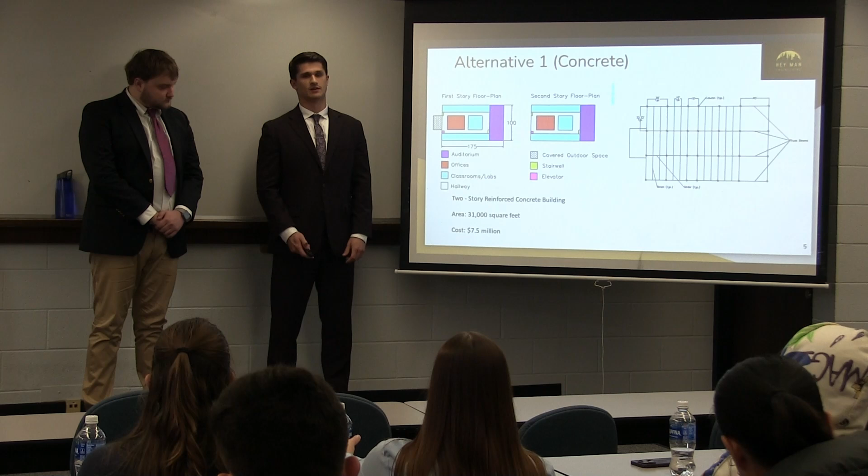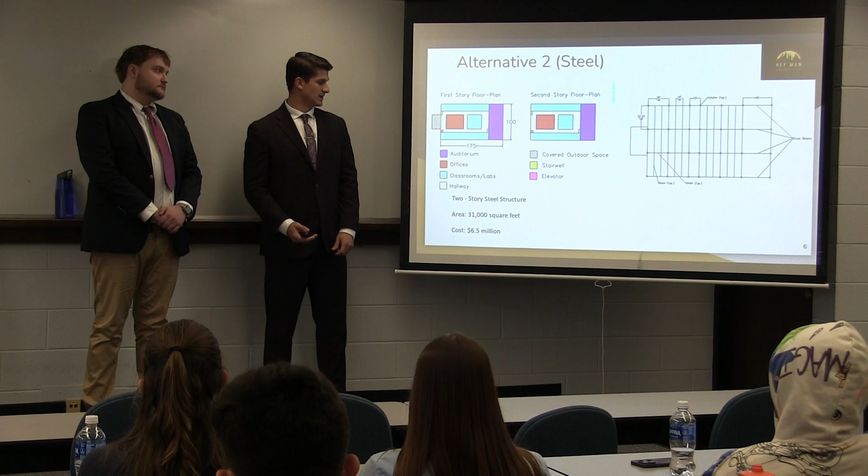Alternative 2 is the exact same as alternative 1, the main difference being it's a structural steel building instead of reinforced concrete. That said, the cost is around $6.5 million, also estimated using RS Means.

Alternative 3 is a little different than the first 2 in that the layout varies. It's a little bigger, roughly 32,000 square feet, and a 2-story steel structure. The courtyard in the center will act as the covered outdoor space, and the auditorium is a little smaller here, around 3,600 square feet as opposed to 4,000. Again, it will be a double height auditorium.

The layout is a little more complex than the first 2 alternatives, just something I want to note. Lastly, the cost was determined to be $6.8 million for this alternative.

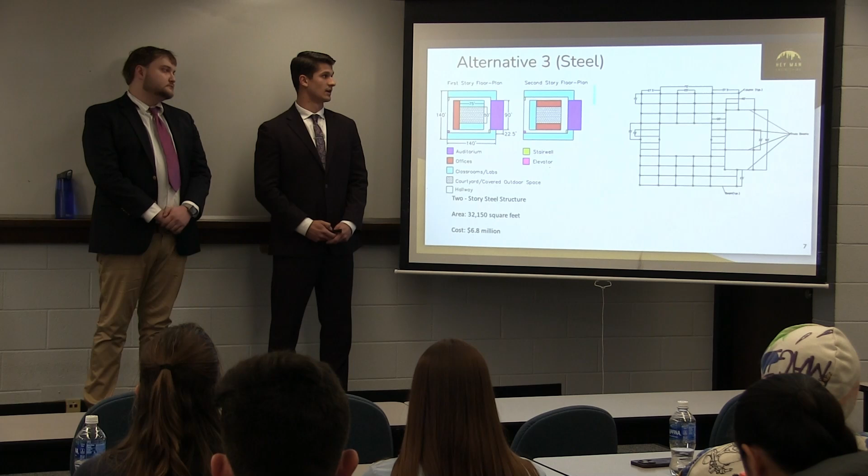This evaluation rubric pits the alternatives against each other, so it's not necessarily about market cost. If the alternatives are significantly higher than market cost, that's not the point; rather, if alternative 1 has a higher construction cost than alternative 2, then alternative 2 receives a higher score in that category.

The reasons for this include: it was the least expensive alternative compared to alternative 3 and alternative 1. It was also more feasible and less complex than alternative 3 due to the layout and design, and the space efficiency was also better utilized than alternative 3. Now I'm passing it off to Jack.

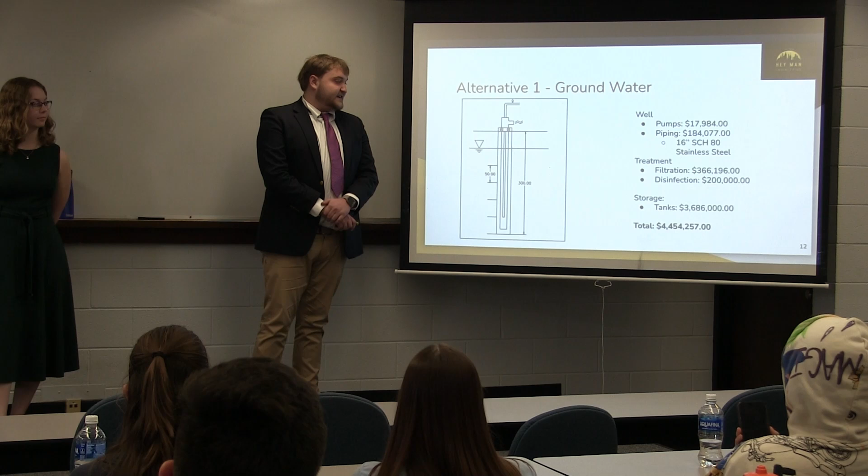As you can see, there will be a water pump on site, reaching about 300 feet in depth below the surface. The water level is about 50 feet below the surface. Calculated with 2 pumps on site, with the materials needed for the piping, the treatment systems for filtration and disinfection, and the storage tanks, this comes to a total of about $4.5 million for the first alternative.

Second, we have surface water, taken from Heaton Lake nearby, about 6,000 feet away, for which I'll need to construct a pipe. Here we have the different sieves that will filter out any large hazards, and a pump that will transport the water through. Calculating each of the costs, it brings us to a $5.5 million cost.

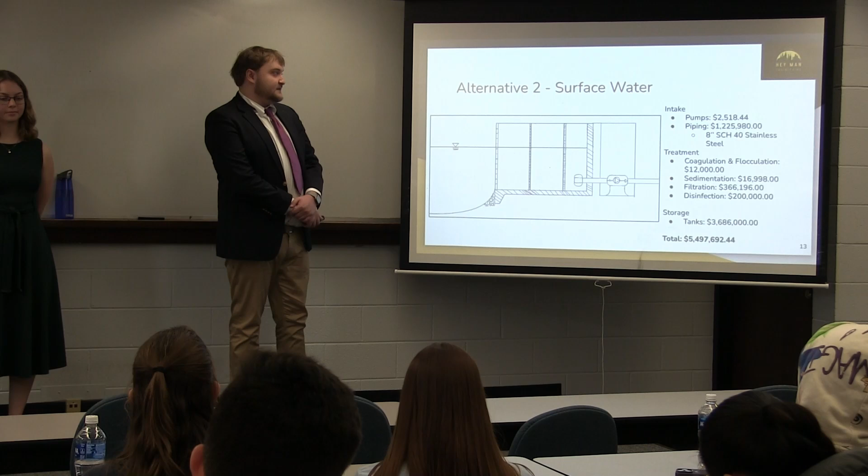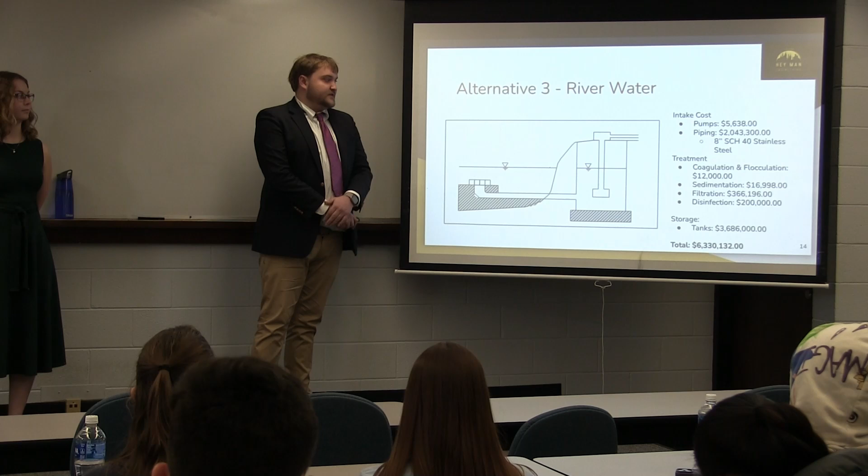Last but not least, we have river water, with an underwater pump that will siphon in water from the St. Joseph River, bringing us to a cost of around $6.3 million.

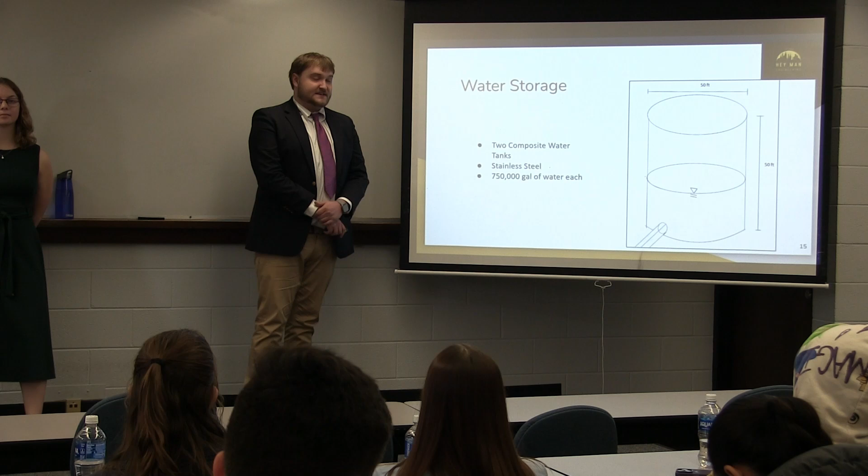We also have a design for the water storage system, with two composite water tanks on site made of stainless steel, each designed to house about 750,000 gallons. My evaluation rubric was organized based on cost, feasibility, complexity of design, water quality of the source, and overall project impact.

The overall project impact basically means how much this will affect the surrounding area—will it be invasive, will it be distracting, and how much work will need to go into designing each option.

Going through my scoring of the alternatives, I determined that compared to the average, the cost of alternative 1 would be more cost effective than the other two. It's also a lot more feasible to create a water pump on site compared to having to build thousands of feet of piping to bring water from farther away.

It's not too complex overall. As for water quality, there will be chances of some contaminants in the groundwater due to stagnation, but that will likely be filtered out by the filters I've put in place. The overall project impact would just be fair with the first alternative.

As for the second alternative, it's above average price compared to the other two, around $5 million. Feasibility is poor, like the other options requiring long piping, which would be very expensive and impractical, especially when calculating in the maintenance costs required.

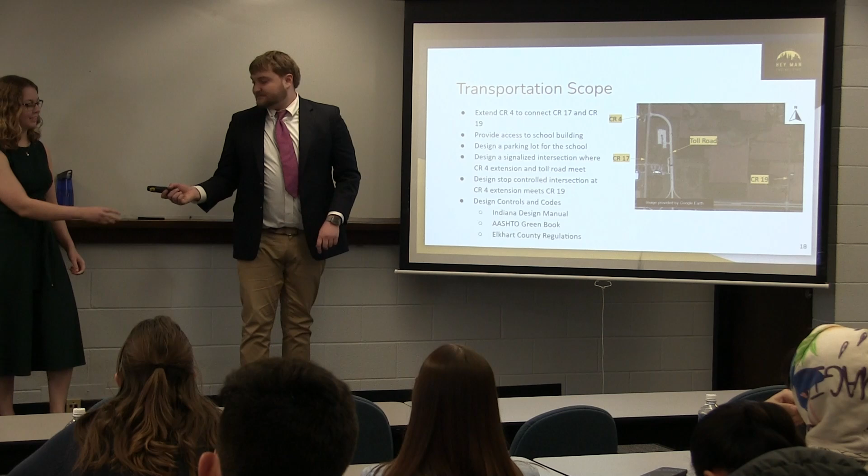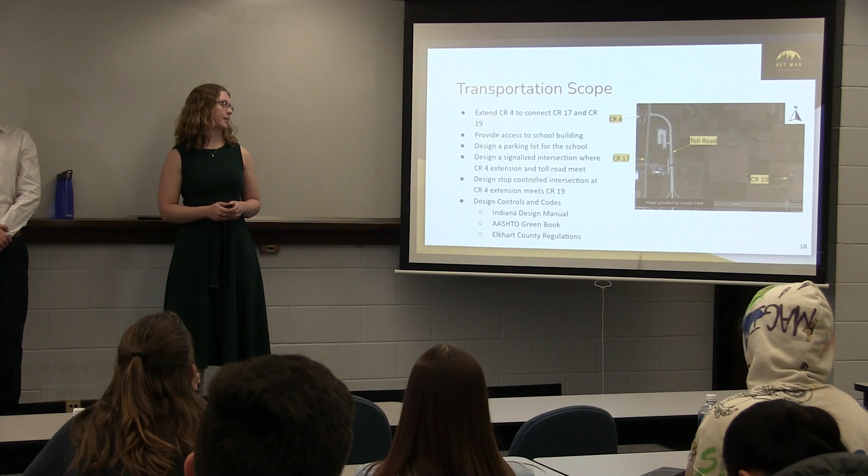Thank you, Jack. Moving into the transportation scope, I'll do a quick recap before getting into my alternative analysis. The transportation scope included extending County Road 4 to connect County Roads 17 and 19, while providing access to the school building being designed, as well as designing a parking lot for that school, a signalized intersection where the County Road 4 extension meets the toll road, and a stop-controlled intersection where the County Road 4 extension meets County Road 19. All design controls followed the Indiana Design Manual, the AASHTO Green Book, and applicable Elkhart County regulations.

For the scope, we were also given an intersection design based on a previous traffic study, which included 2 left turn lanes and 1 right turn lane heading northbound, a left turn lane and a through lane heading westbound, and a through and right turn lane plus an additional right turn lane heading eastbound.

As for the County Road 4 and County Road 19 stop-controlled intersection, no work will be done to County Road 19, as existing infrastructure will be maintained, but there will be a designated left and right turn lane with stopping for County Road 19 traffic.

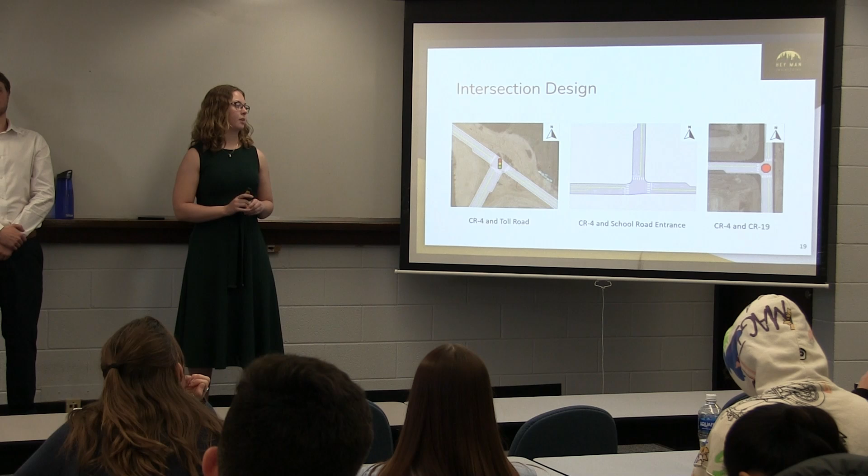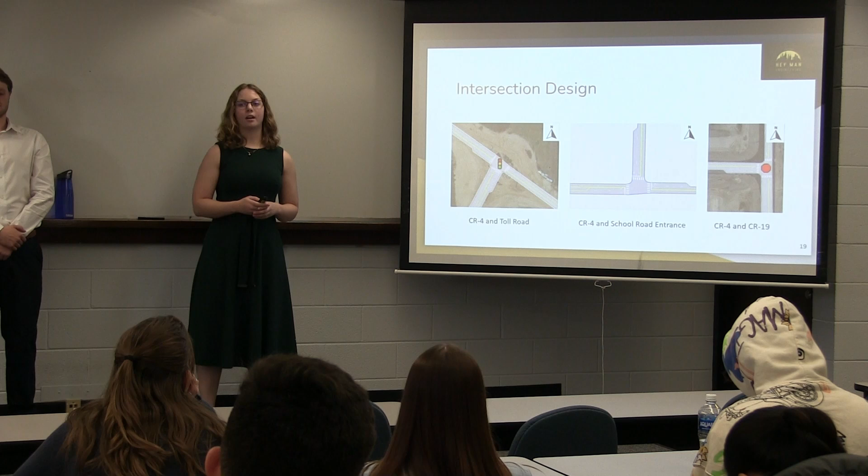Road 4 and the school road entrance. This design will be subject to change per the alternative chosen.

A big part of evaluating my alternatives was determining a cost estimate. This was using the INDOT unit price summaries along with the Indiana design manual to determine a travel lane being 12 feet, an uncurbed shoulder being 8 feet, an auxiliary lane being 12 feet, and then ditch width for fore slope and back slope, which will be used for further design next semester.

Additionally, I decided to use asphalt for my design. I was able to get a structural number with aggregate depth of 8 inches, a base asphalt depth of 4 inches, and a surface depth of 2 inches, as the ideal structural number for school zones is between 3 and 4.

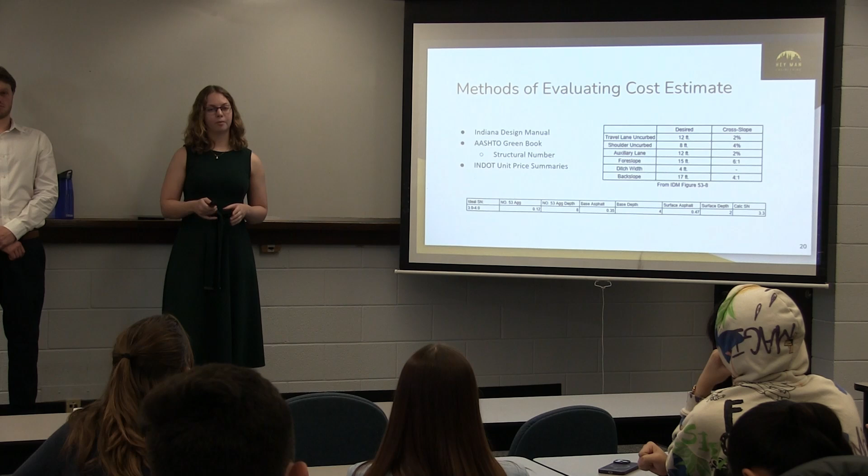My alternative one is a 3-way signalized intersection, tying into the existing toll road, and has 2 entry and exit points into the school. The cost for this alternative was estimated to be about $1.5 million.

Alternative 2 ties into the existing toll road, not adjusting its layout much at all, and would have a 4-way stop or signalized intersection, with 1 entrance into the school parking lot.

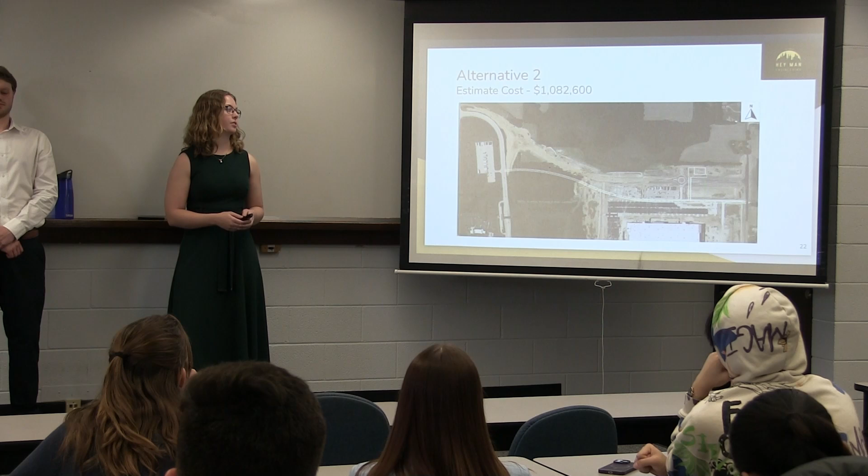My third alternative is similar to my first alternative, but the entrance to the school is much closer to the parking lot, shortening the distance between the connecting road and the parking lot.

Using my evaluation rubric, I determined the key parameters being cost, space required, traffic flow, pedestrian safety, and environmental impact, weighting these as impact and cost being the highest ones, since we don't want to go into the wetlands and floodplains. Then I rated these on a scale of 1 to 5, 1 being poor and 5 being excellent.

I determined that design alternative 3, with the shortening of the road connecting the school parking lot and County Road 4, being the best alternative for this project. There are 2 entrances and exits, and it's a 3-way signalized intersection instead of a 4-way. It had the best traffic flow during peak times.

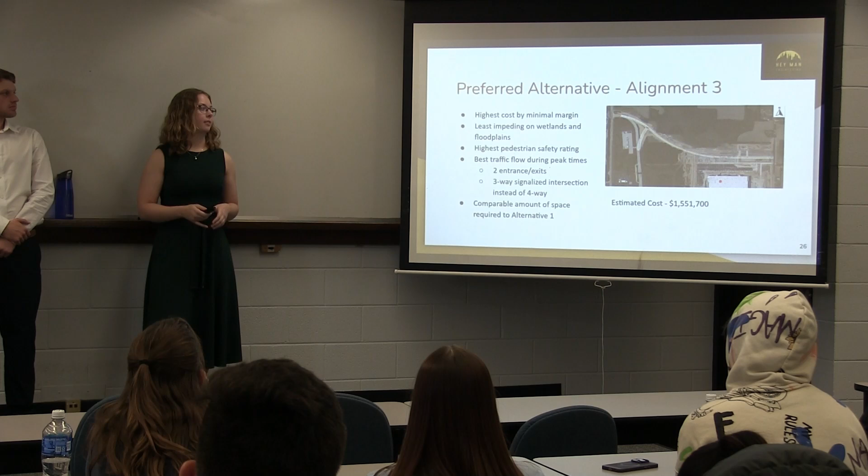I was not able to analyze that because I do not have specific numbers, but just visualizing it with there being 2 entrances and 2 exits, it would have better traffic flow during drop-off and pickup times. The estimated cost for this one was about $1.5 million.

Now moving into my parking alternatives, my parking alternative 1 has 90-degree parking, 60 stalls, 3 being ADA accessible and 1 being ADA van accessible. This allows for 2-way traffic and has 2 entrances and exits. The estimated cost for this was $200,000.

My parking alternative 2 has 45-degree angle parking. It has 2 compact spaces, 3 ADA spaces, and 1 ADA van accessible space. This allows for 1-way traffic and also has 2 entrances and exits.

My evaluation for this one was similar, but I did not include the wetland impacts because where I was placing the parking lot was not within a wetland. I also switched around traffic flow and pedestrian safety due to there being a lower speed limit within a parking lot, prioritizing traffic flow over pedestrian safety.

Parking alternative 1 was my chosen alternative. This is because it has greater room for vehicle maneuvering, requires less space, had a lower cost, and the pedestrian safety and traffic flow were comparable between each alternative.

So moving on, I'm going to pass the torch to the structural person, Alex.

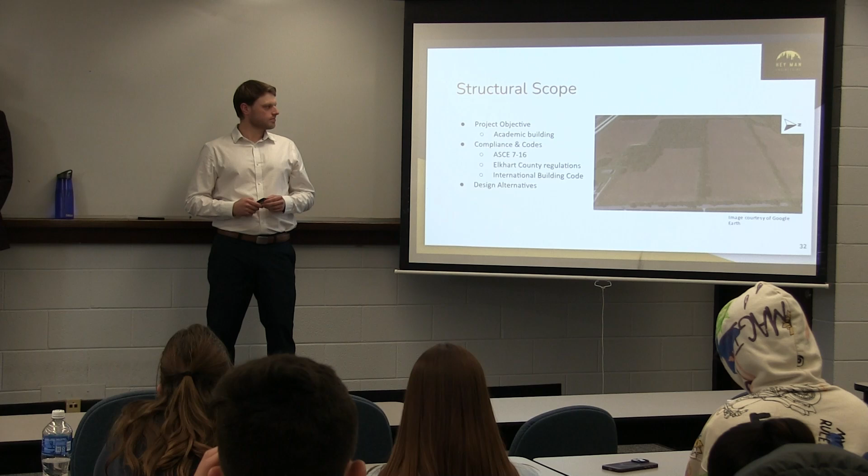The work completed so far, just like in the progress presentation, includes a site analysis done in compliance with my team to decide where the building should be on the site.

Also, load determination and code compliance kind of go together, determining live and dead loads depending on which material we want to use. For the design alternatives, I have floor plans for first and second floor. This will be a 2-story building.

Material selection and research, just researching which 3 materials I wanted to use for my 3 alternatives. Beam, column, and girder layouts will all be the same for each alternative. And then my alternative that I ended up selecting.

So the same as the project presentation, we have our first story plan and second story plan. On the far right, we have the auditorium, which will be one large room. And then a covered outdoor space on the left, and in between we have our labs, classrooms, and office area.

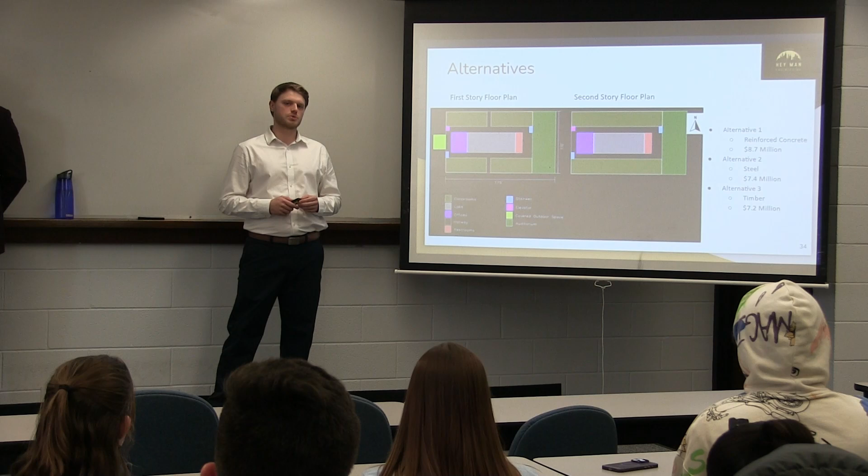Moving on to the right side, we have the alternatives, so I decided to do 3 alternative materials for the same building design. For reinforced concrete, all of the estimated costs were construction costs using the RS Means data, and I got 8.7 million for reinforced concrete, 7.4 million for steel, and 7.2 million for timber.

Moving on to the column, beam, girder layout, so all of this will be the same. On the far right, we have our auditorium. The thing for the auditorium is that there will be a truss design to help support it rather than just beams and girders, so there will be no columns in the middle of the auditorium.

On the left, we have our covered outdoor space, just some beams. As color-coded, girders are blue and columns are little green dots that are spaced out at 23 feet and 27 feet horizontally. Beams are covering the other spaces.

For my evaluation rubric, I took into account 5 key parameters, which include construction cost, feasibility, aesthetics, environmental impacts, and space efficiency. All of this is on a weighted scale and is rated from poor being 1 and excellent being 5.

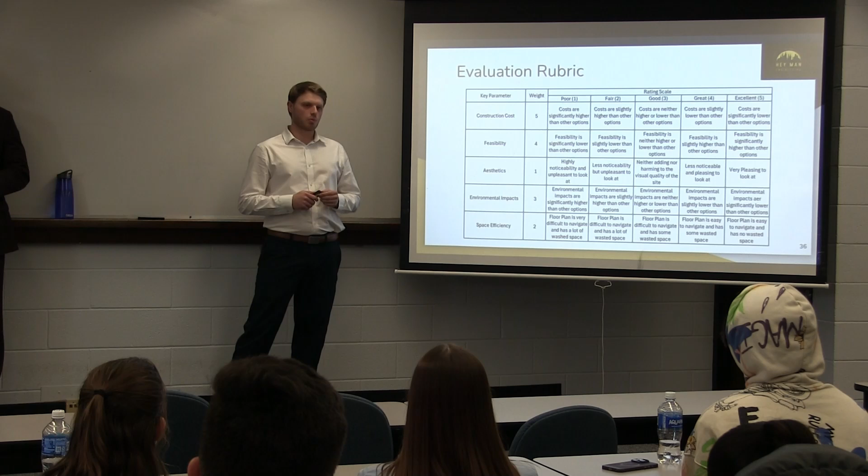Moving on to deciding which alternative I wanted to go forward with, we have the same parameters and a weighted scale. It ended up that alternative 2 was the best one to move forward with, so I selected alternative 2, which will be a 2-story steel structure with 32,000 square feet, 570 feet as a perimeter, and using RS Means the estimated construction cost is just below $7.4 million.

Just to further the point home of alternative 2, not just those reasons, the cost efficiency and the speed of construction. Steel is not the least expensive one, but it is very efficient in constructing it because you can create some of the materials off-site and move them onto site to help speed up construction. There's also a high strength-to-weight ratio of steel as compared to other materials, and the durability. Steel is much more durable than other materials that were considered, and has a long lifespan, which leads to less maintenance when checking on things in the future.

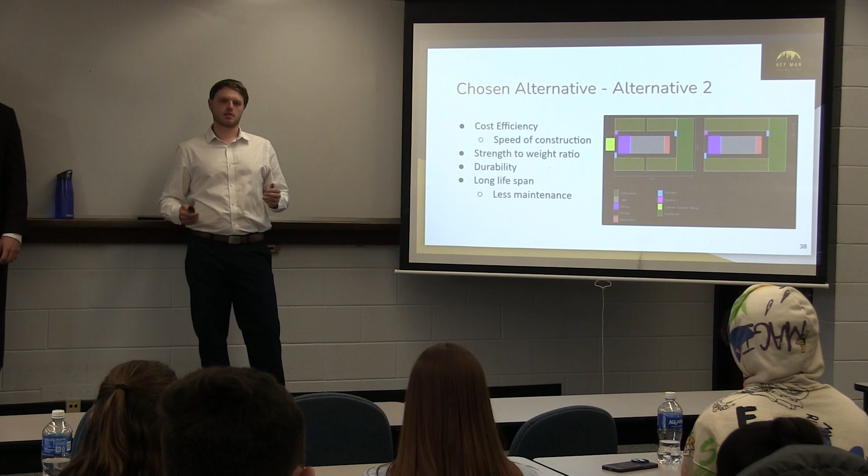Now we'll be passing it off to Barrett for the cost.

So this is our phase 2 design cost estimate, which is for next semester. I included myself in here, so that will have to be removed next semester as I will not be here. But just the disciplines, we split it up by discipline: project manager, 2 structural engineers, an environmental engineer, and a transportation engineer. Our hourly rate included overhead and profit, and our total cost rounded out to be around $60,000.

Here is our construction cost estimate. This has a similar format to our phase 2 design cost estimate. The one thing to note is that the structural portion will be using Alex's numbers, just because I will not be here next semester. The total cost for the construction is around $13.5 million. Add in 10% contingency, and that turns out to be around $15 million. Any questions?

Maybe we start with you, Barrett. I want to ask you the same questions I asked Abby in here about your cost estimate, and about... I think I see where you're going with this.

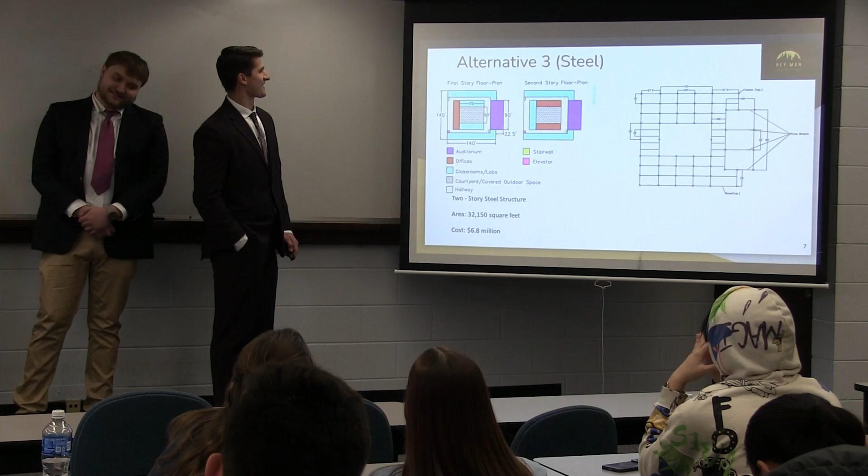Are you talking about this figure? Yeah, look at these numbers, there seems to be a trend here. I think the record is with Jack now, he got to 0.44 in pennies. Since this is a schematic level, preliminary type of design, the expectation is you guys can be close to maybe 10,000 or even 20,000, so don't expect anything near $500 or $1,000 in general. I'll leave it there.

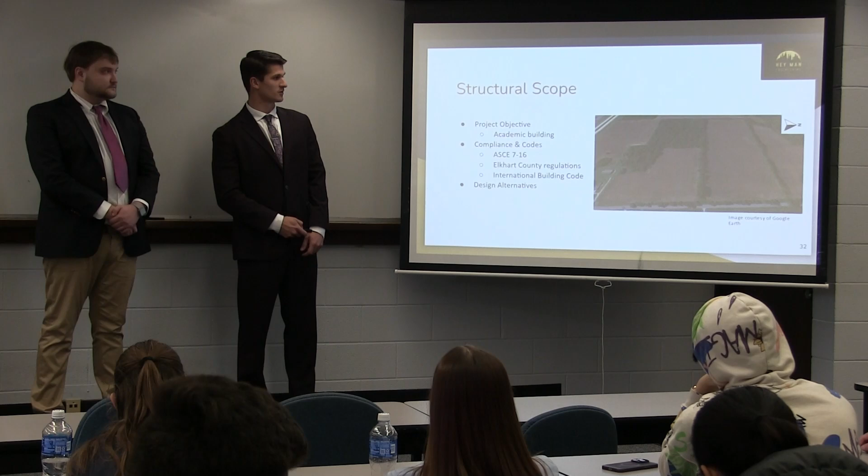Well, the reason I did it this way is just because I wanted to give more specifics on at least my individual alternative. At the end is when we rounded for the total construction cost, so that's kind of why we did it that way. As you can see, no 500s, no cents or anything like that.

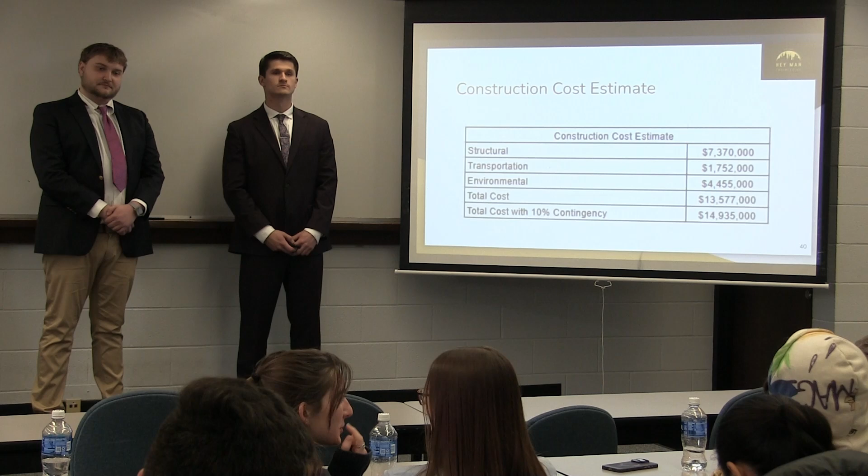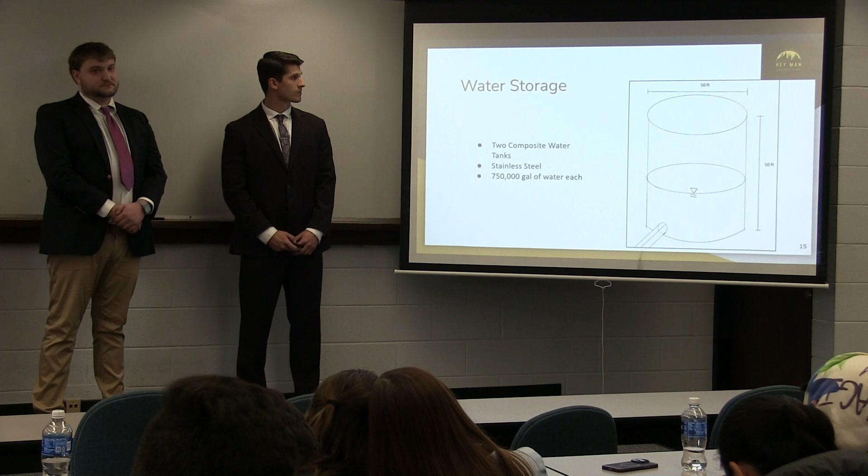Pretty perfect. You made a very good statement about the environmental impact, which is the second point. You said this is relative here. But did you consider, because I'm reflecting back on what was presented, she said this is the carbon footprint here. Did you guys use any sort of calculator, because they do exist, for the different types of materials? This is where I'm going to pick on Alex, because he gave the same score, like a 3, for all 3 different alternatives for environmental impact. So though he's using wood, steel, and concrete, why is this? Don't you think there will be a different environmental impact? Alex, you can answer, then I'll go back to Barrett.

Yeah, so when we're evaluating, what it says is that they're kind of not close, but they're kind of the same, if that makes sense, and there's not a super high on one side and high on the other, so that's why I chose 3 for most of them. So why is it a criterion to start with, if it comes back to be the same score for all alternatives? I guess preliminary, it was one of the 5 things that we wanted to go forth with as a group. I feel like we all used kind of the same 5 key parameters, so that's kind of why I followed through.

I'll accept the answer, and I guess I'll pass the cost and environmental impact. Jack, you presented the different sources, like 3 different sources: the lake, the river, and the groundwater. Yes. How about the treatment? The treatment plant, the treatment process? I had included the different treatment budgets in each of the alternatives, because some would require less than others. What are the treatment techniques or processes?

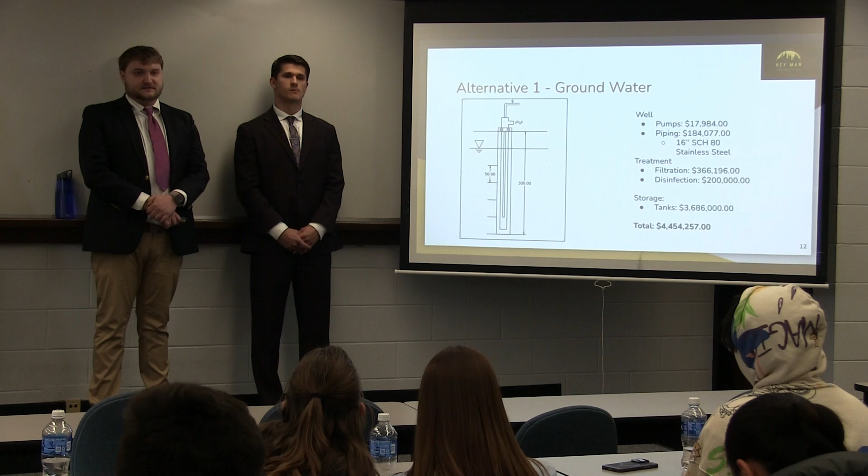Did you do preliminary schematic level calculations to figure out the required or estimated sizes? I've done estimated sizes. These were not included in this presentation, but they were included in my calculations. Okay, thank you.

Leah, I want to ask you a question, for my own knowledge: what is the minimum length of an acceleration lane? It varies based on the design speed you're at. For this one, it's 45 miles per hour, so coming off from a stop, the acceleration lane is going to be larger. I have not calculated it yet, but I know the taper length has to be 100 feet, beyond that I would have to do some calculations. Thank you, that's good, that's all what I need.

Yeah, I mean, that's it. Thank you.

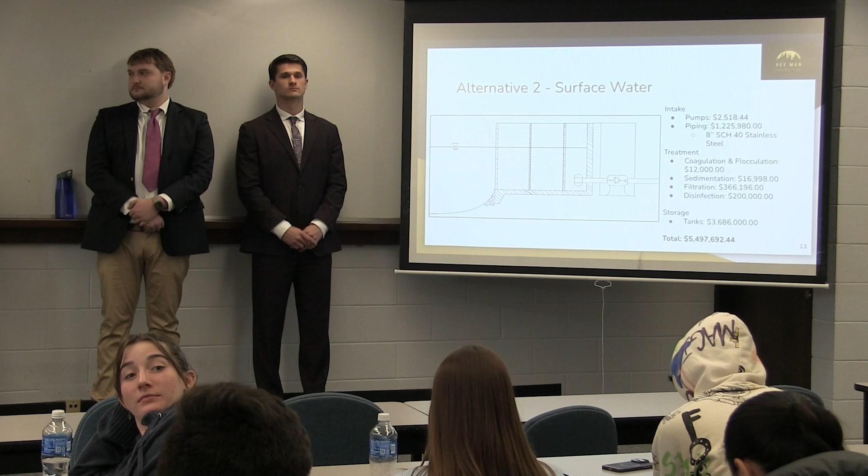I encourage all of the transportation folks, but especially you Leah, because this is a school zone, the pavement marking and the signing and all that stuff is gonna be a little more complex than just a stop sign. Yeah, so I did account for pavement markings in my cost estimate, and with the 10% contingency, most of that will be going to school zone regulations. That'll be accounted for in our cost.

I have no questions.